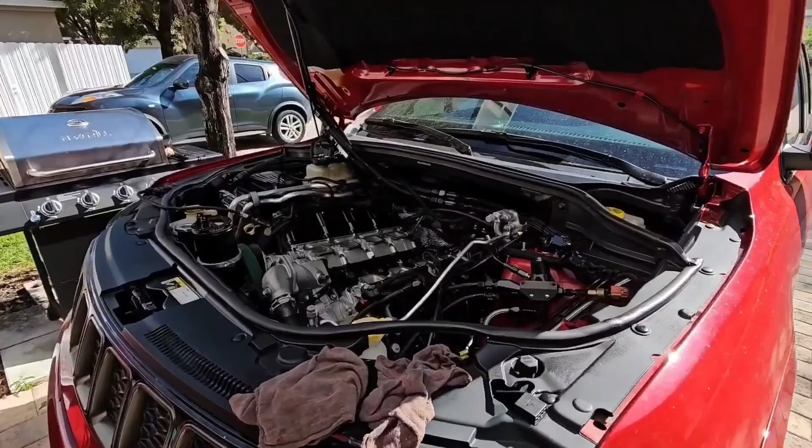So we got the Hawk. This unit had a Gen 5 Whipple on there before. We took that off, sent that to Whipple because we had some issues with that. And the owner upgraded to a Gen 6. Gen 6 is brand new, just released, 3.8. So we're going to go ahead and get that installed here.

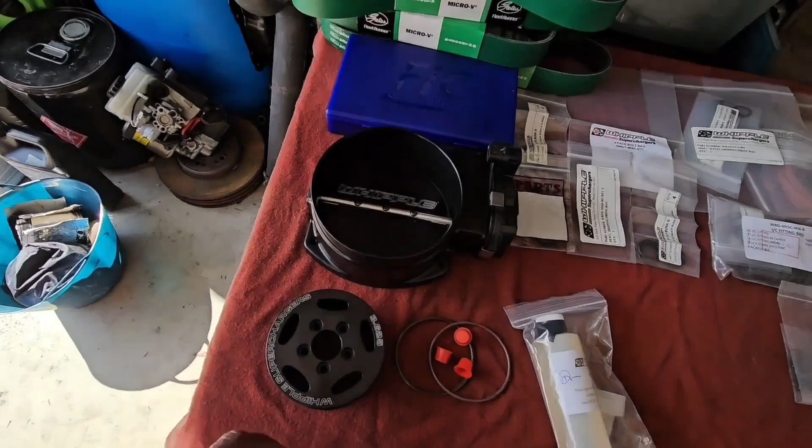We also have a nitrous plate from Nitrous Outlet that we're going to go ahead and install also under the Whipple supercharger. Let's go ahead and take a look at what we got. So we got the Whipple here, massive unit. We got a bunch of parts that came with it, pulley, throttle body. We got some FIC injectors, a bunch of belts. We got all the hardware and stuff that came with the kit.

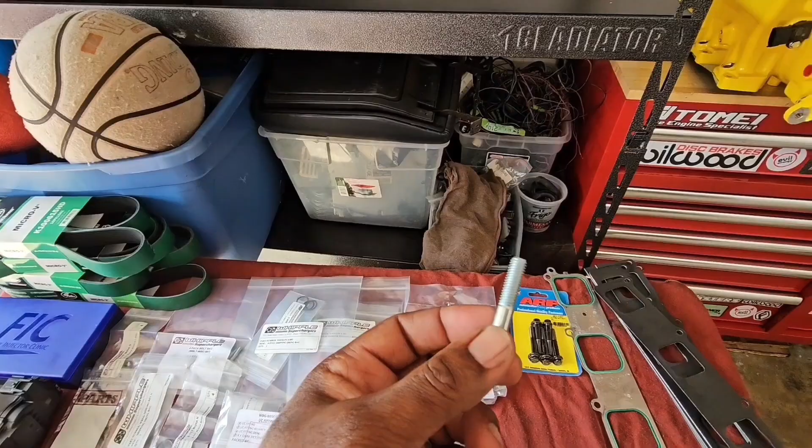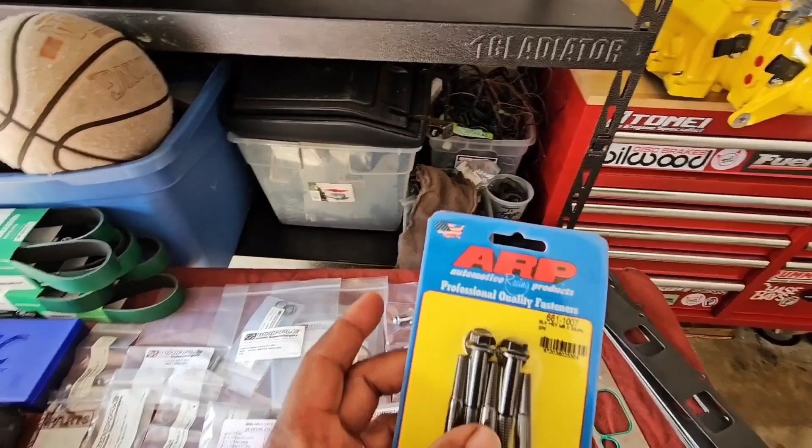One thing we did have to get is some extra bolts. These are the bolts that hold the Whipple to the head. But because we're using the plate, we needed some longer bolts. Those weren't supplied with the kit, so we had to get some ARP ones. So if anybody's interested, that's the part number there. You're gonna need a total of 10 bolts.

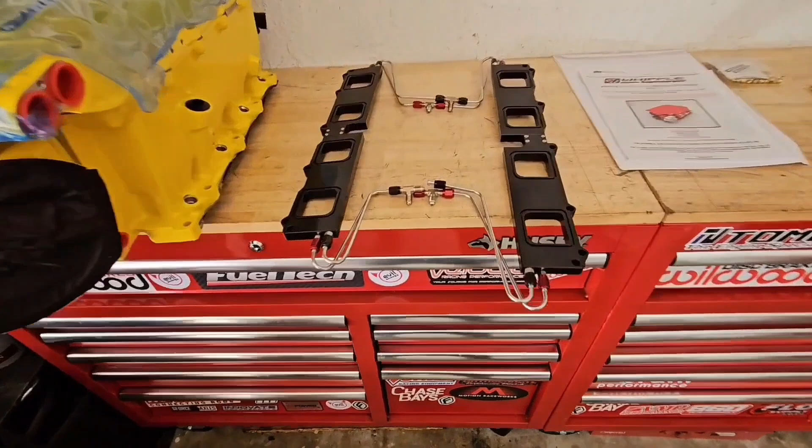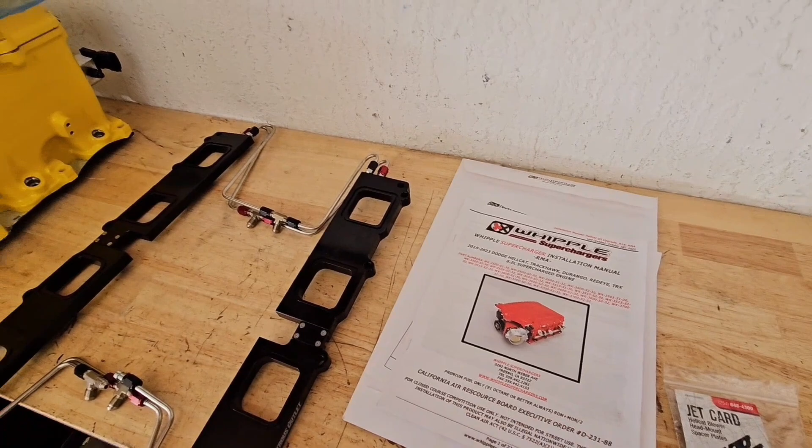These are 50 millimeter. I believe these ones are 40 millimeter factory. Let me see. Should say it right here. 10. These are 30 millimeter. So these are 30, these are 50. So we got that. We got the Nitrous Outlet plate kit. Super nice. That sits under the Whipple. We got the jets here. And we got the Whipple instructions. So we're gonna go ahead and jump right into the installation.

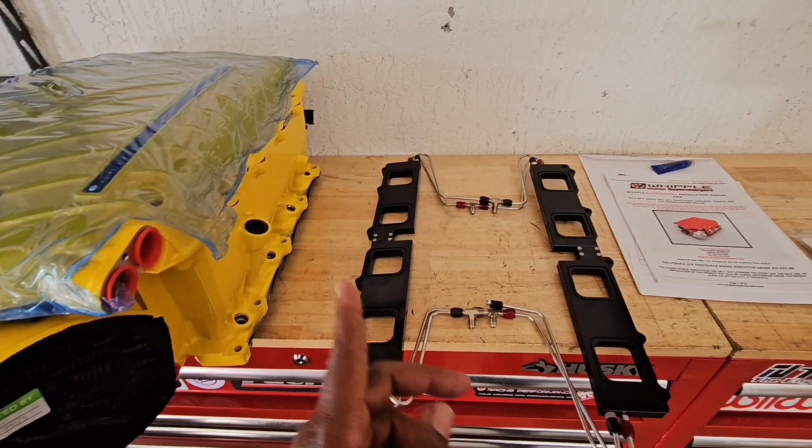First thing I'm gonna do is assemble. Well, I already assembled it. This is a dry fit. So I'm going to pull it apart, install the correct jets. Also going to use some red Loctite on all the fittings because this sits under the Whipple. The last thing you want is for one of these to come loose and you have to take the supercharger off to deal with that. So red Loctite should do the trick. So I'm going to go ahead and pull this apart and install the correct jets with the red Loctite.

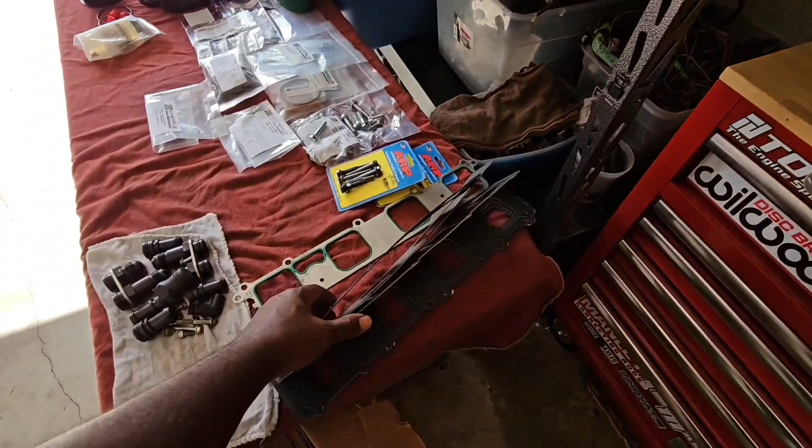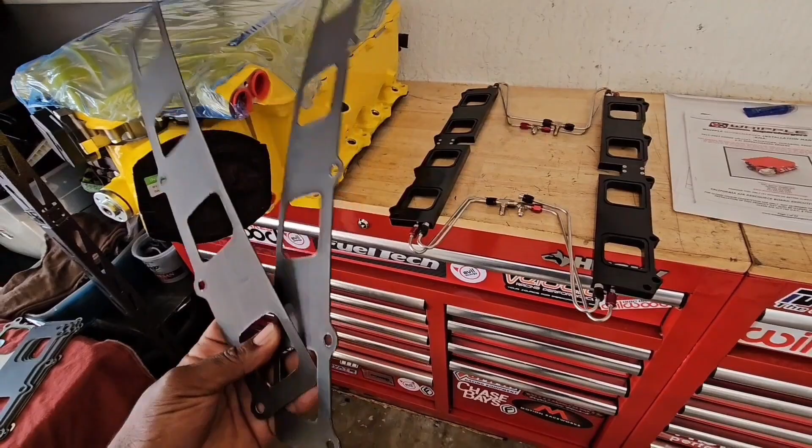And we're going to go ahead and get this on the head first with the gasket. Got a bunch of gaskets here because you Mopar guys are weird with your gaskets, man. I'm gonna be using the Whipple supplied gasket between the head and the plate. So I'm gonna put the plate on first, because of these lines and stuff, and then put the Whipple after. So I'm going to go ahead and assemble this and then jump right back in with you guys.

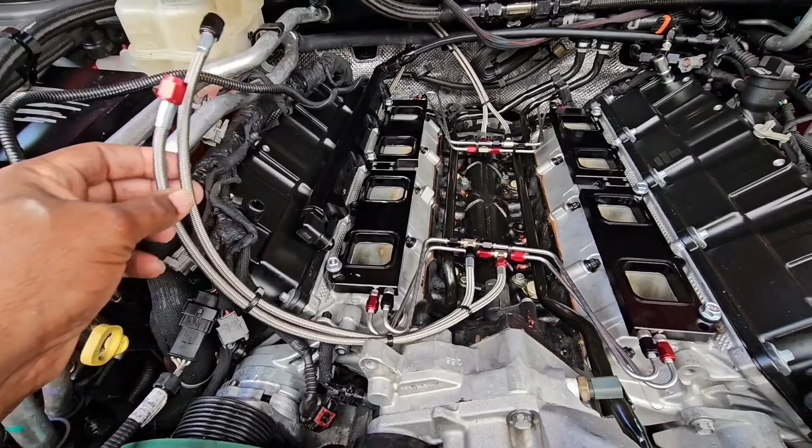So I have the Nitrous Outlet plate assembled and bolted down to the head. I applied a little bit of silicone underneath. So once I lift the bolts up, this is going to stay in place and I could place the supercharger on top without having it shifting around. That helps with the alignment of the gasket and also the alignment of the plate. So I have that bolted down. I have the lines pre-ran, and that's basically how it looks.

So once I'm ready, I'm going to remove the bolts and then I'll put the supercharger on top and bolt that down. But before we do that, I got a couple more things I have to do to the supercharger. So let's go ahead and look at that. So I got the supercharger here and I'm just running through the instructions. Basically, instructions 1 to 4 are swapping over the various map sensors and the coolant temp sensor. Pretty simple.

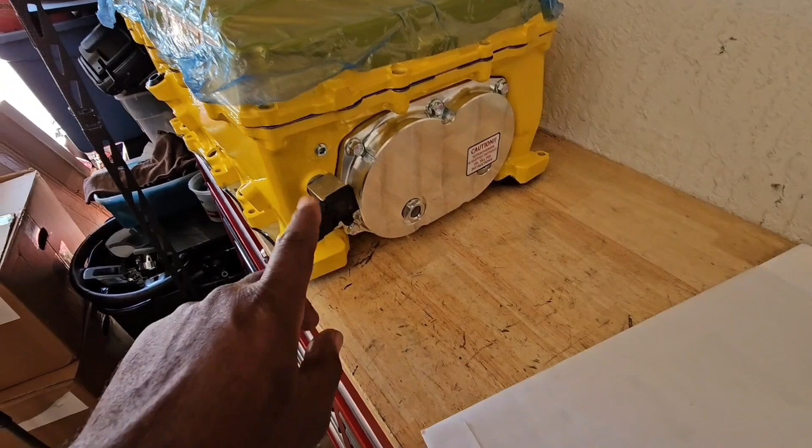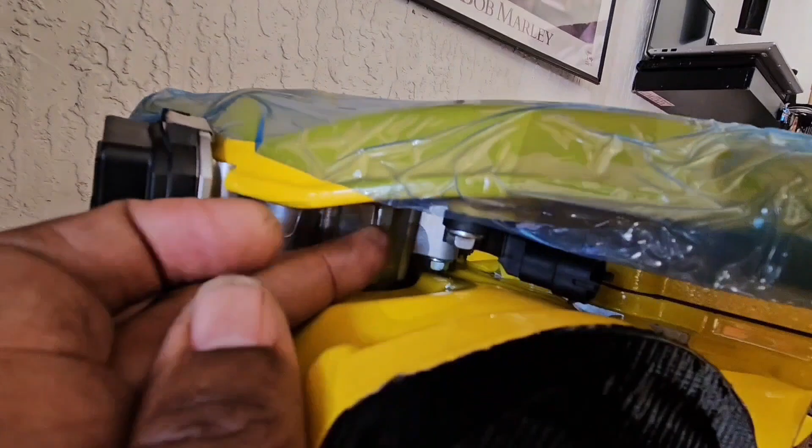So here we got a map sensor here. We have an adapter because we need a boost port. If not, this would have bolted straight to the supercharger. So one map there. We have one right here and one more right there. And then we have the coolant temp sensor right there. So that's basically swapping over the different stuff. In the instructions, it's a little different because this instruction, I believe, is for a Gen 5. So you can see here they show 2 ports in the back, but on the supercharger itself it only has 1. So I mean, it's pretty self-explanatory.

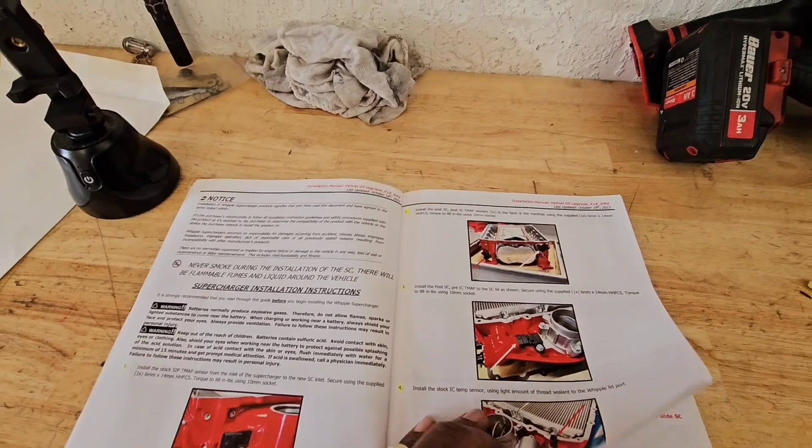They added that one that was here, they added that to the front because now the front has 2 instead of 1. So basically 1 through 4 is just swapping over the map sensors, coolant temp sensor.

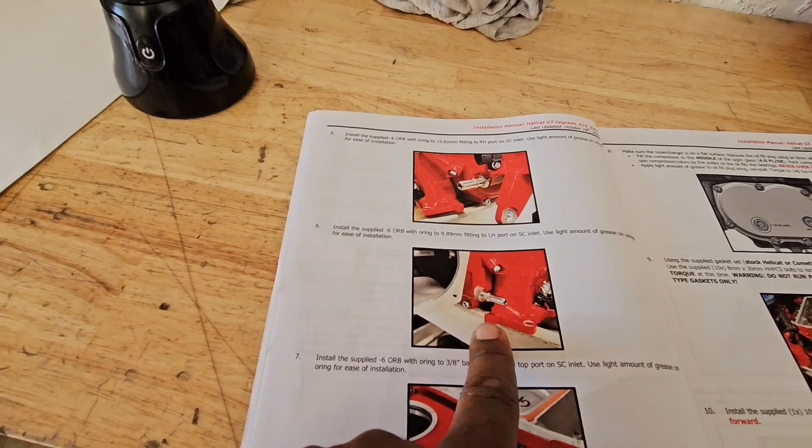These 5 and 6 are some ORB fittings. Not sure if I'm going to use those yet, so those would go here, and same thing on the other side. I'm gonna leave those out for now because I might not use those. I might block them off. They're easily accessible once the Supercharger is on the car, so I'll wait to either add those or I'll have to add some block offs for those.

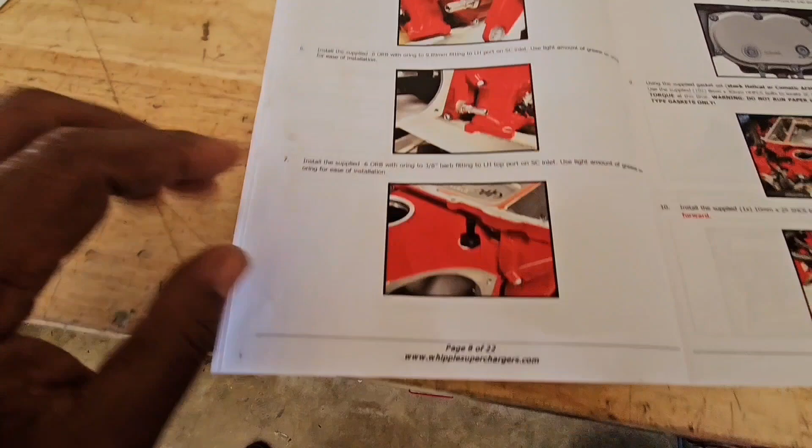This one, again, instruction is for a Gen 5. This fitting is not there on this Supercharger. So as you can see, that's the throttle body there. That's the opening for the inlet. That would be right here. And we don't have that port there. So again, this is a Gen 6. It's pretty new. This is the Gen 5 instruction, so there are very little differences there.

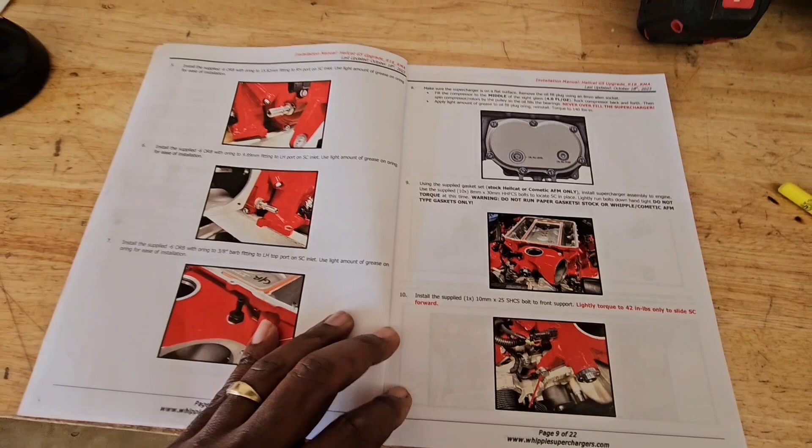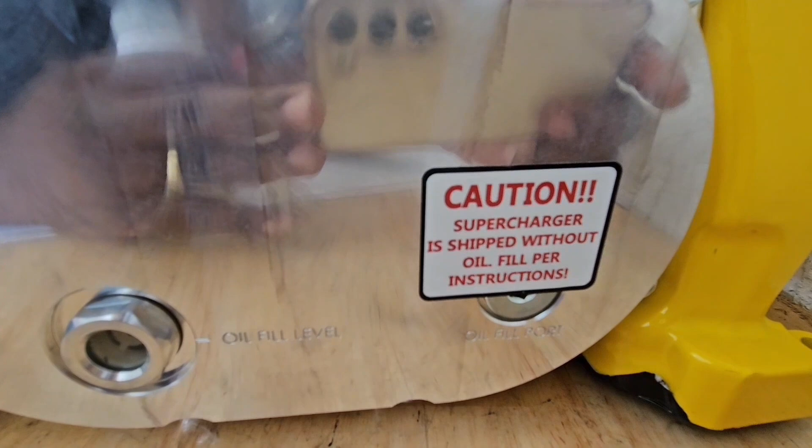So the next step where we're at is going to be adding the oil to the Supercharger. So let's go ahead and jump right into that. So we got the supplied oil from Whipple fit in, and as you can see what it says right there, Supercharger is shipped without oil. Fill per instructions. Alright, so per the instructions, we're gonna fill to the little glass here about halfway, and then spin and rotate the compressor to get the oil into the bearings.

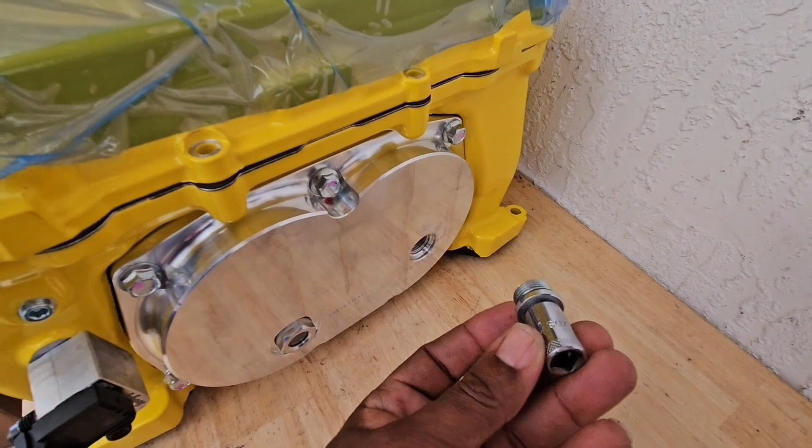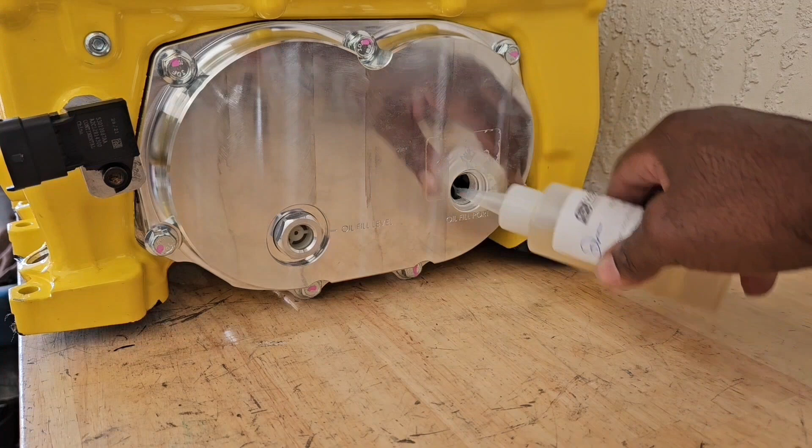So we remove the plug. That's an 8mm Allen. Remove the plug, and we're gonna go ahead and fill with oil. Alright, so we got it here. We got cut off at an angle. We're just gonna go ahead and spray the oil into the Supercharger. You want to make sure you also have this on a flat surface, so that way you could get the best reading for the amount of oil you're putting in there. You're watching in this sight glass here. You want to have the fluid about halfway or in the middle of this glass.

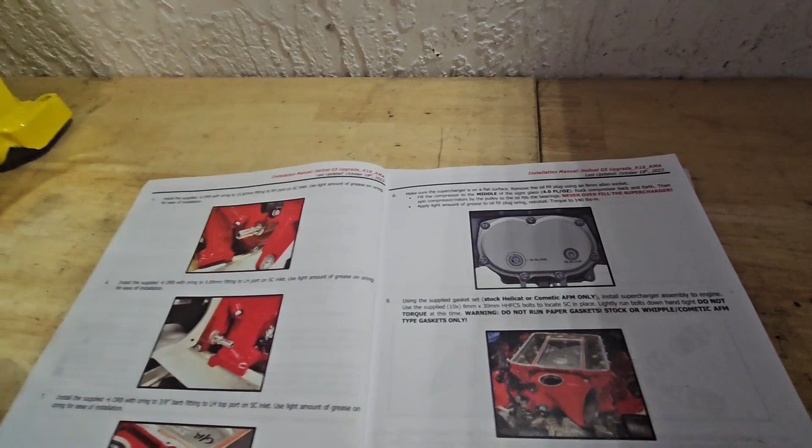Okay, so there's something I want to go over. As you guys saw, I just put 4 ounces into the Supercharger. It's nowhere close to the sight glass to being halfway. The instruction calls for 4 ounces, but the instruction is wrong. So I checked, double checked with Whipple, double checked with some other people, and it seems like it takes about 5.8 ounces. So we had to get another bottle of oil, and we're gonna go ahead and continue putting that in. So again, it's not 4 ounces. You're gonna fill it until you see it halfway in the sight glass.

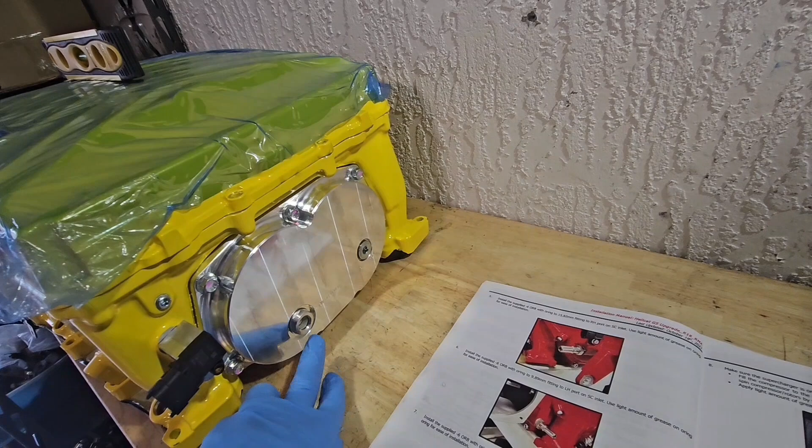And the Supercharger is level, because I had to double check for myself, because I was second guessing myself. But yeah, so don't really follow the instruction. Fill it until you see it halfway in the sight glass. That's a more visible way of knowing how much oil you have to put in there. Again, you don't want to overfill it, but you also, most importantly, do not want to underfill it, because then the bearings are not going to get lubed properly and you're going to have premature failure. So let's go ahead and add the rest of oil and get that level up correctly.

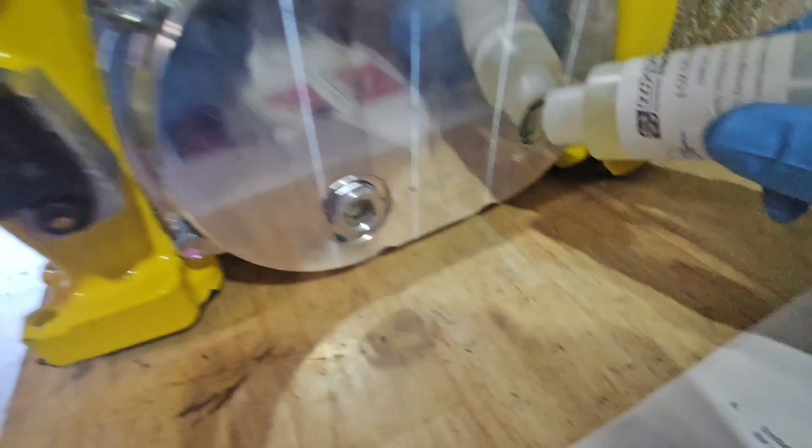So just want to show you guys close. You can see now we have fluid coming up in the sight glass. We didn't have nothing before. So right there, right now, we are about halfway. I'm gonna go ahead and spin the rotor, get everything moving a little bit, and then check the level again. So we are perfect. Right there, you can see the level, good to go. And what did we use? Just right about, I'll say right about half of the other bottle.

So yeah, half would be about right - that's 4 ounces plus half of that would be 2 ounces, so 6. They call for 5.8, so we're pretty on the money there.

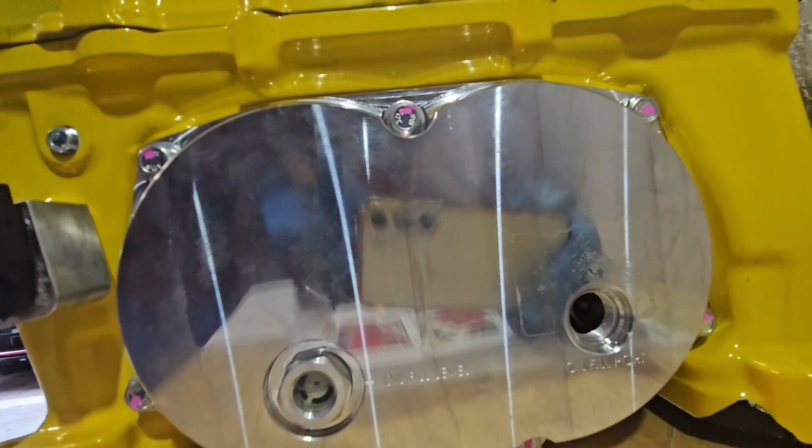I'm gonna go ahead and put back the bung. Just make sure you drop a little bit of lube on the O-ring so it doesn't go in dry and rip the O-ring. Let's drop that back in, then move on to the other steps.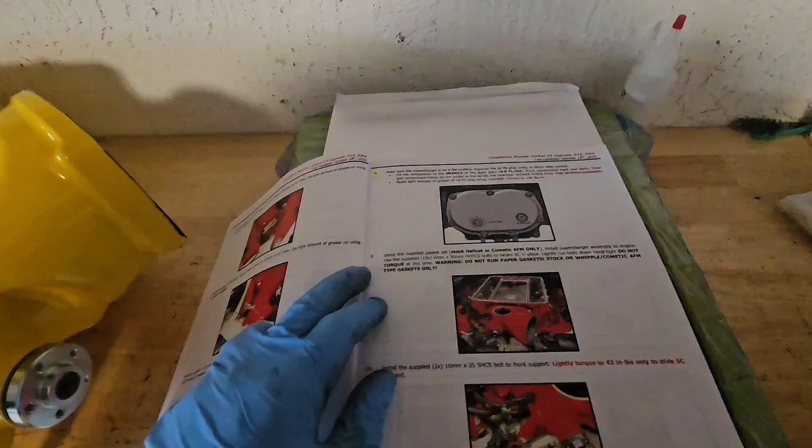Alright, so we got the oil in, step 8. Next step is going to be step 9, which is putting the Whipple on the motor.

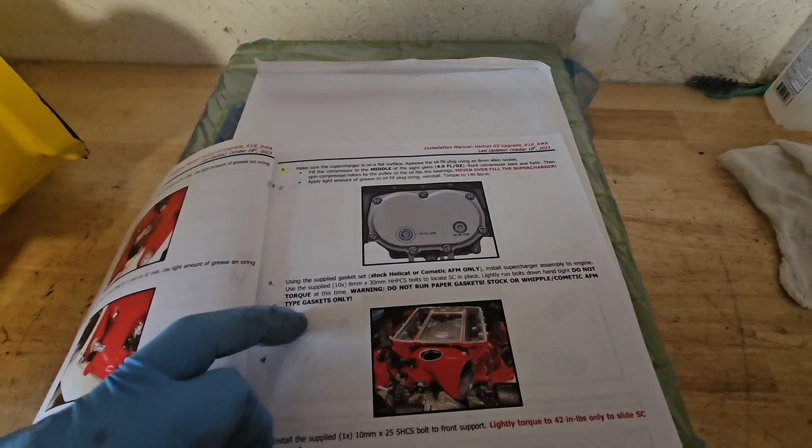The instructions basically say use the stock gasket or the Whipple gasket, don't use the paper gasket. Pretty self-explanatory, not a big deal. We're using the Whipple gasket on both the Supercharger and the nitrous plate. We got an extra set of Whipple gaskets, so we're gonna go ahead and throw this onto the motor.

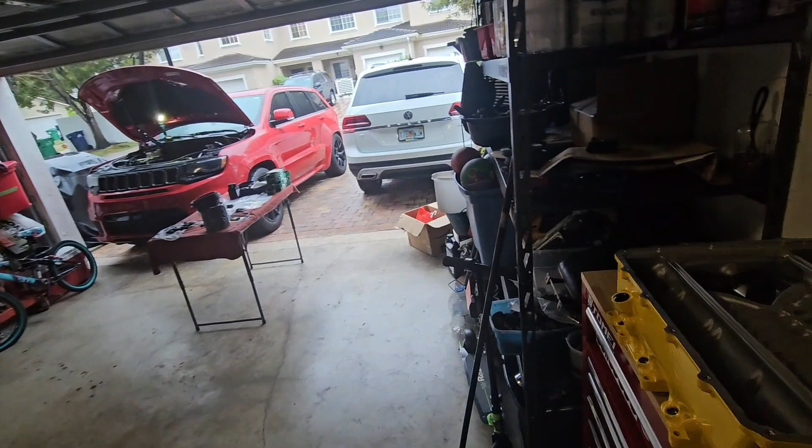I got the bolts here. These are titanium 50mm bolts that we had to get because of the plate - we had to get extended ones. These are the ones from Whipple, I believe they're 30mm. Got a little bit of blue Loctite on the bolts already.

We got the gaskets already there. I put some silicone on the gasket and bolted them down so everything stays in place. So you should be able to just put the Supercharger on without having the gaskets or anything moving. Let's go ahead and get that done, and then I'll jump right back in.

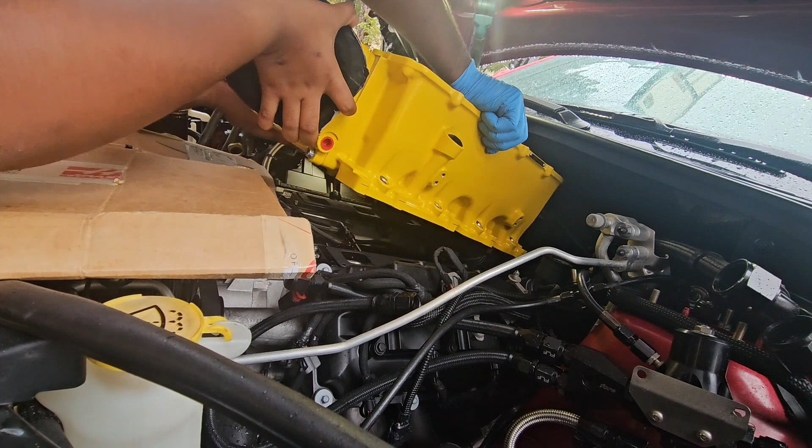Ready? Come back, don't go there. Down. Thank you. Just gotta put it in and have it seated properly.

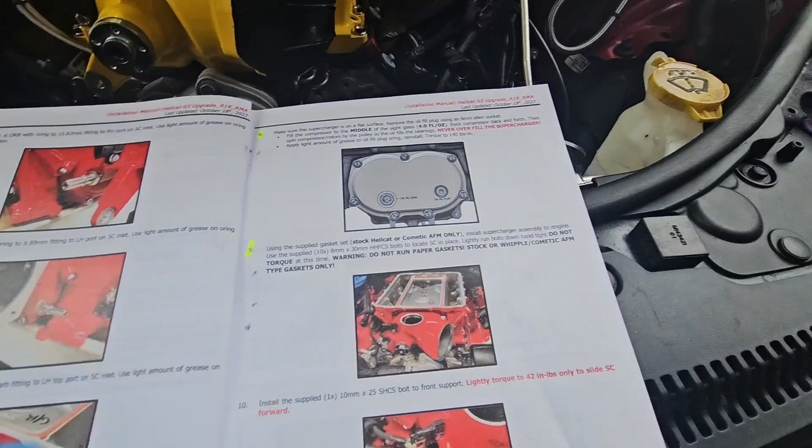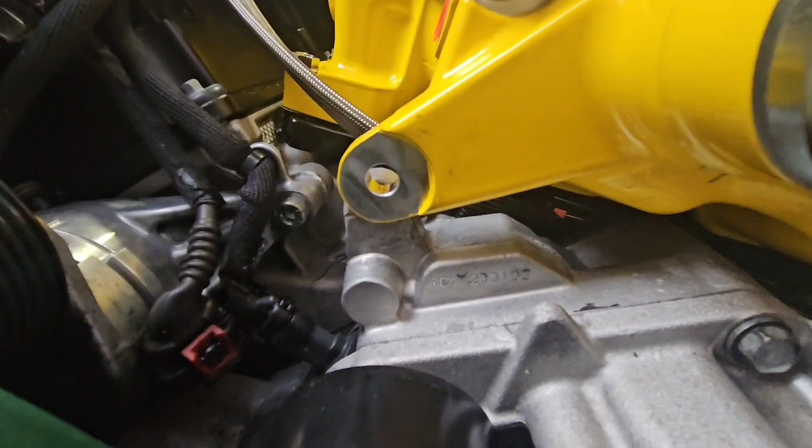Alright, so we got the Whipple on, step 9, boom. Step 10 would have been to add the front bolt to support the front of the Whipple, but because we have the nitrous plate, this one sits a little bit above the hole so it doesn't line up. Once we're done, we're gonna fabricate a plate to bolt it here so it does support.

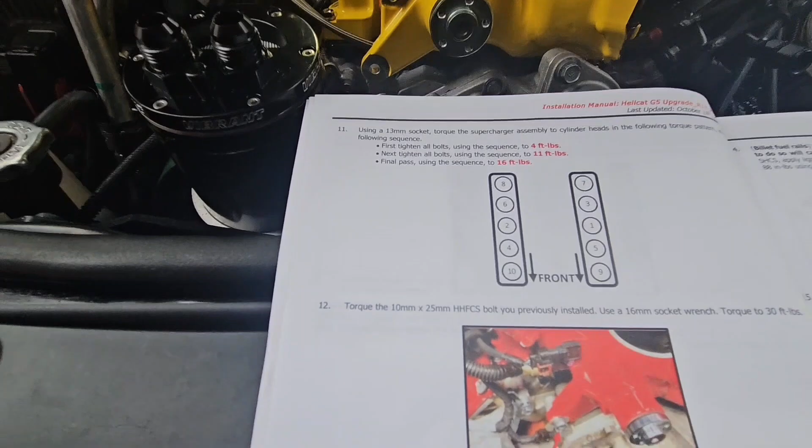So that step I'm gonna skip for now, not gonna mark that one, just like these other ones I skipped earlier. Gonna skip that one, and the next step is gonna be to torque all 10 bolts for the Whipple. I already ran them down by hand - see there, all 10. This is the torquing sequence provided by Whipple.

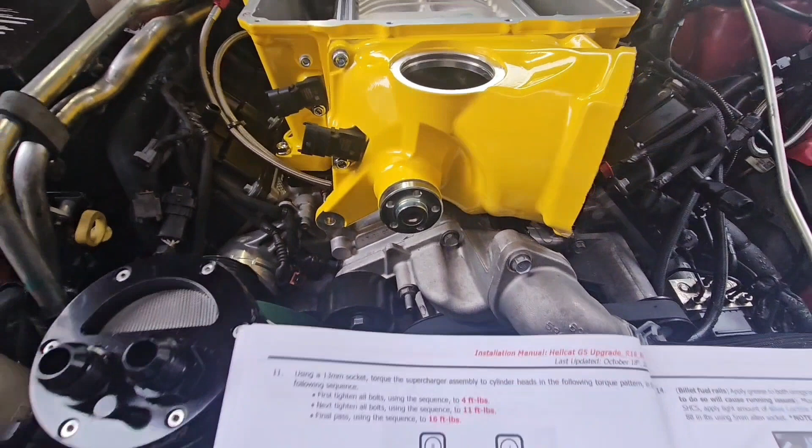What I did was mark it here on the Supercharger lid so that way I don't have to keep going back to the book. Use a Sharpie and just mark it there. Same thing Whipple said - the sequence they want you to do is 4 pounds, 11 pounds, and then finish with 16 pounds. So we're gonna go ahead and get that started.

Alright, so we got the first sequence completed, 4 pounds. After each sequence you just want to test the rotor, make sure it spins freely, nothing is binding. If something is binding, that's an indication that it's not being torqued down evenly and the case is twisted. So we're good to go - we're going to move to the next step, and that's 11 foot-pounds.

So we got it all torqued down to 16 pounds, all 10 bolts, and everything spins freely, no binding, so we're good to go on that.

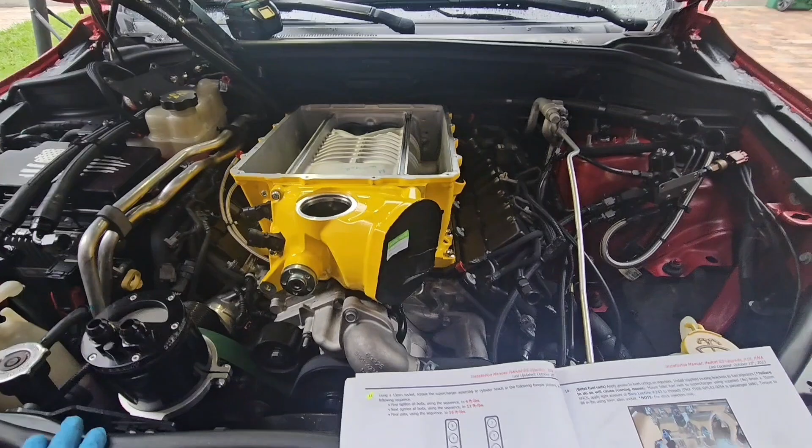When torquing, guys, you just want to make sure you're giving it a smooth motion - no twisting, jerking, just a smooth motion - and follow the torque sequence. I mean, it's there for a reason. So we're good to go on 11.

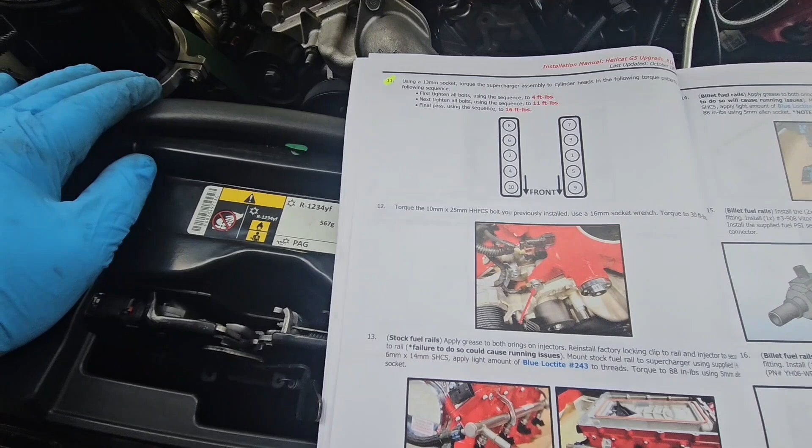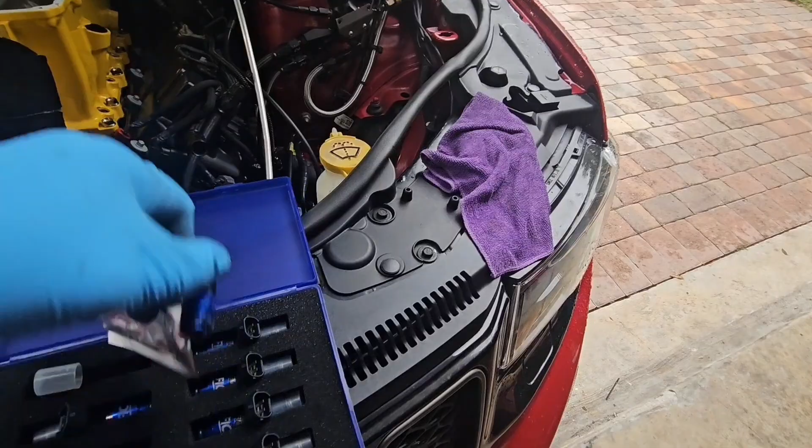So I got the injectors, these are some FIC 2150 it looks like. Before I put the injectors in, guys, you should know this - lube the O-rings. Don't want to go in dry, you already know what happened when we went in dry. Don't want to go in dry. So lube the O-rings, I'm going to lube them and then go ahead and place all injectors in place.

So let me go ahead and do that. I don't need to record that. Let me go ahead and do that, then I'll jump back in.

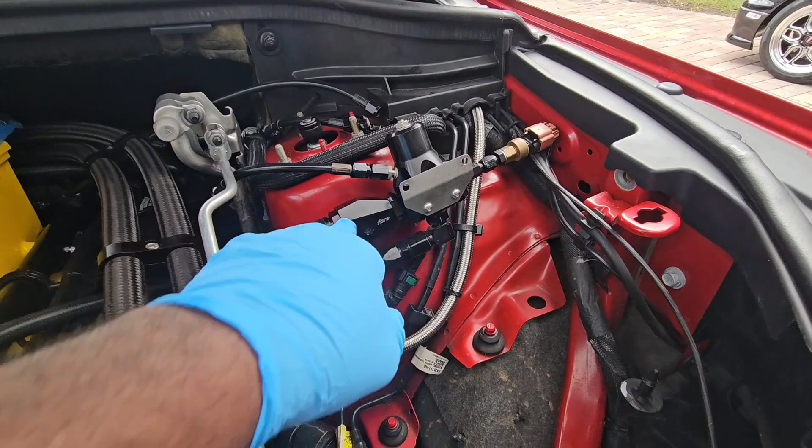Alright, so we got the fuel rails in, FIC injectors in, everything plugged up, and I laid the harness down. Same thing on this side, the rail is in, harness plugged in. On this side we got the regulator, a fuel rail, and a fuel line here. This one goes to that side, but the way they had it running was under the blower.

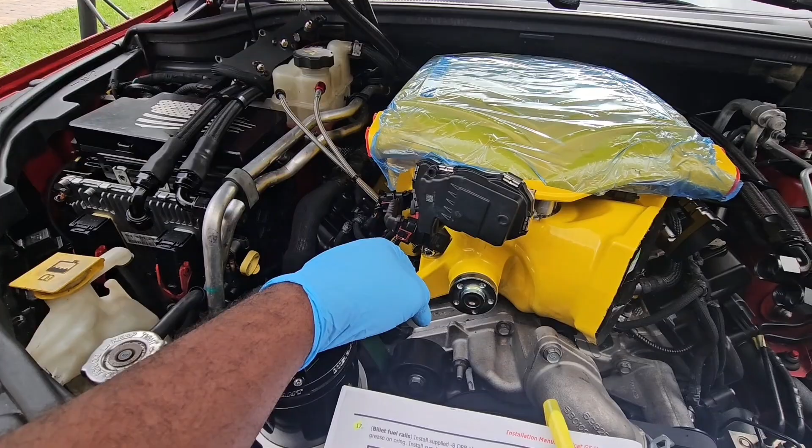I don't like that, so I'm gonna remake that line and run it along with these lines, just behind the blower and coming right here. So I have to do that, but I could do that later on. I don't have to do that now.

So the next couple of steps is basically putting the brackets and stuff on, but this car already had a Whipple on it, the Gen5 3.8, so it has all the brackets and all of that already. So all of that step I'm gonna be skipping.

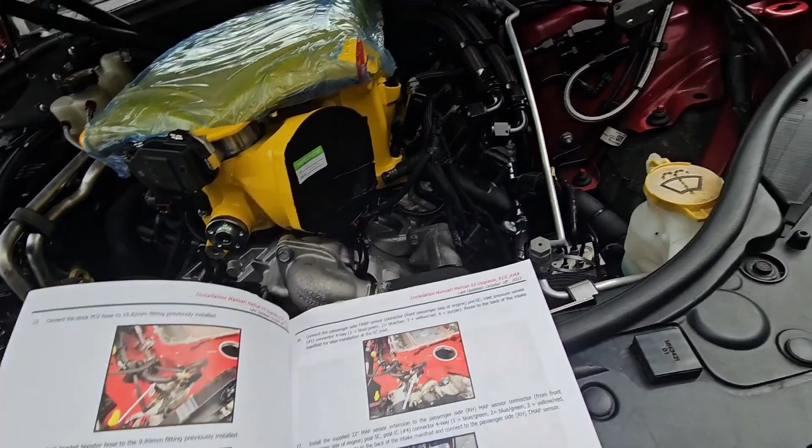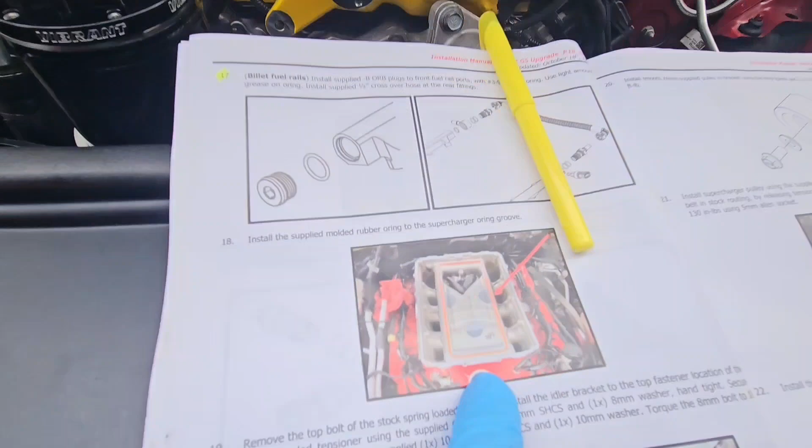So basically the next thing I'm gonna do now is take the lid off. I just rested it on there to cover everything. Take the lid off, put the O-ring that Whipple sends on, you see here the O-ring seal, bolt the lid on, and then just skip through the instructions and go from there.

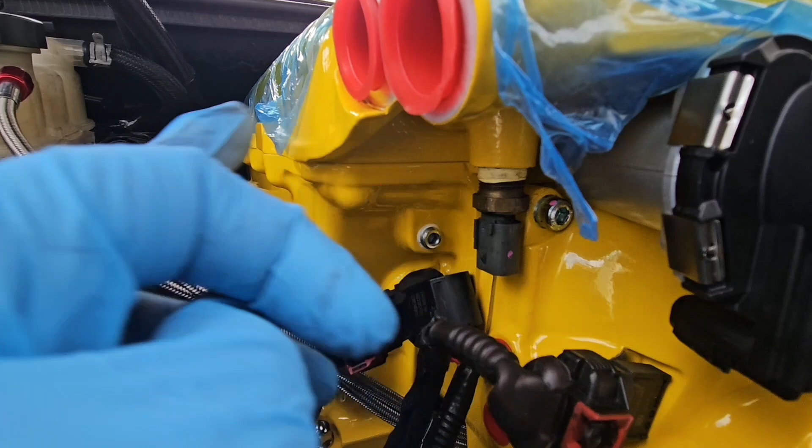I already started plugging up the MAP sensors and all of that. This is for the coolant temp sensor in the blower, or the air temp sensor. That one I didn't plug in because I have to take the lid off. So I'm gonna do that and pretty much go from there - take the lid off, put the O-ring seal, and then bolt the lid on.

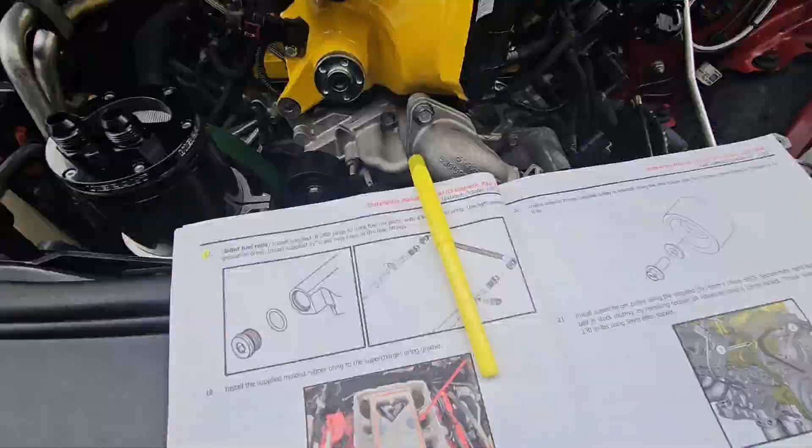So I got the lid O-rings. It also comes with this O-ring that's for the throttle body. It goes right here inside that indentation right there. So don't forget to put that one or you're gonna have boost leaks. And then the main one for right here. So we got that one in and we got the O-ring in.

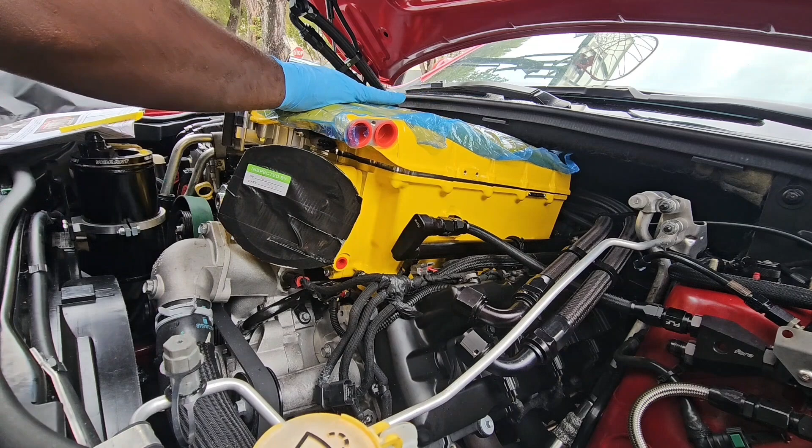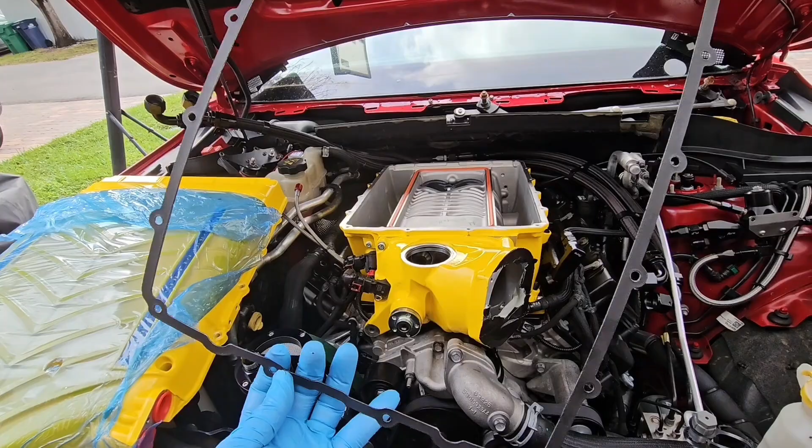Don't be like me guys and forget to put the gasket on. I got the O-ring for the cooler, and I also got the O-ring for the throttle body, but I initially forgot to put the gasket on, so I had to take the lid back off. So remember to put the gasket, don't be like me. So I'm gonna throw this on and then throw the lid back on.

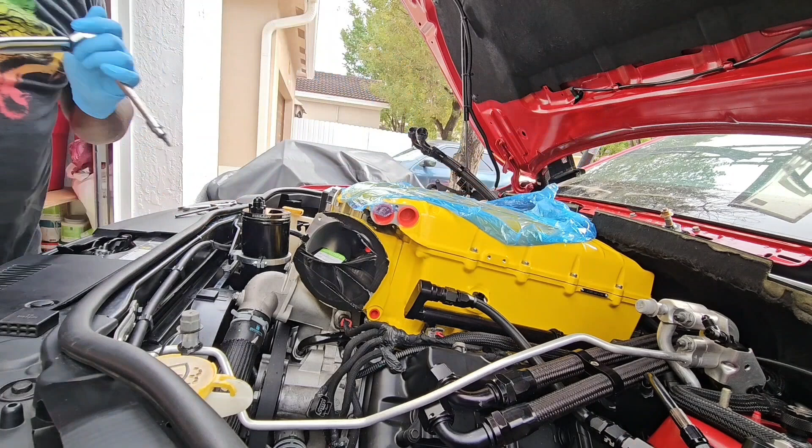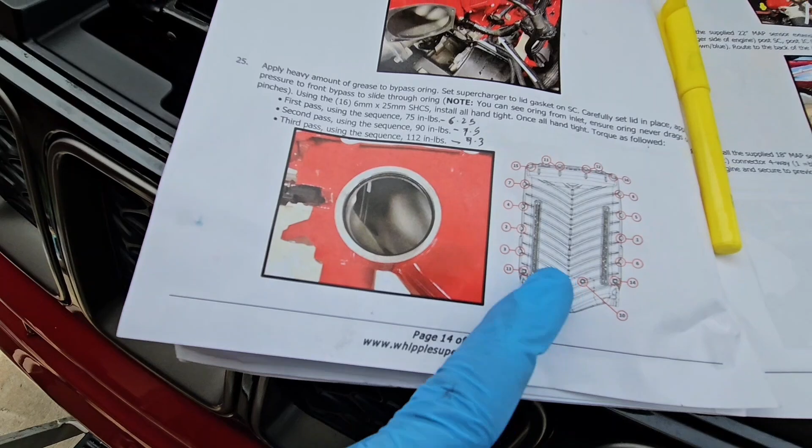Okay, so I got the lid on with the O-ring here for the throttle body, with the gasket, and with the O-ring, so the lid is on. Torque specs are in the book, let's pull that up - torque specs here or in the book. Right here it also has a tightening sequence, which is also good to follow. Not as important as the first one with the base, but still important for proper sealing.

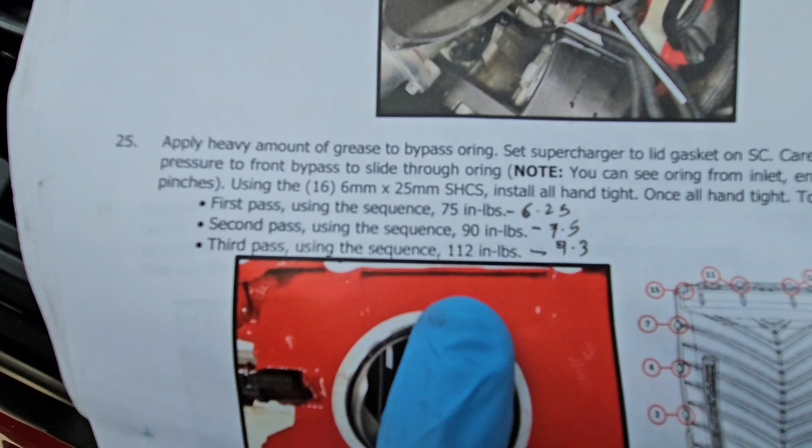The torque specs are in inch-pound. I converted them to foot-pound because I don't have an inch-pound torque wrench. So it's 6 1/4, 7 1/2, and about let's say 9 1/4 there for that, in foot-pounds. If you have an inch-pound wrench, use the inch-pound spec.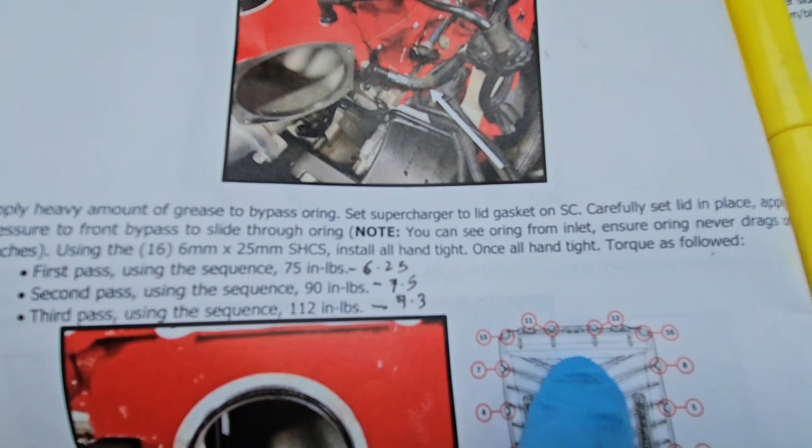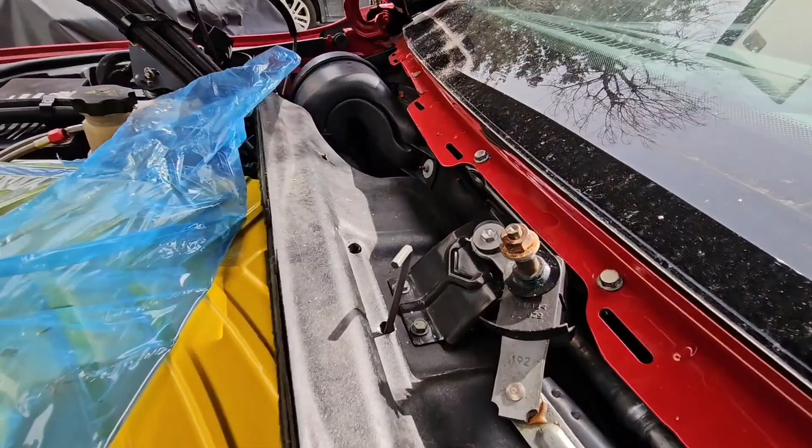For the 2 bolts in the rear, which are these ones here, because we have the nitrous plate and also because of how big the Whipple is, it's really hard to get back there to tighten the bolts. So what I did, and I spoke to the owner of the car before I did this, I drilled 2 holes right there. This is under the cowl for the windshield wiper, so you won't see it because it has a cover here. So I drilled 2 holes, about 10-11 millimeter size holes, so I could fit the bolt and also an Allen wrench to tighten in the back.

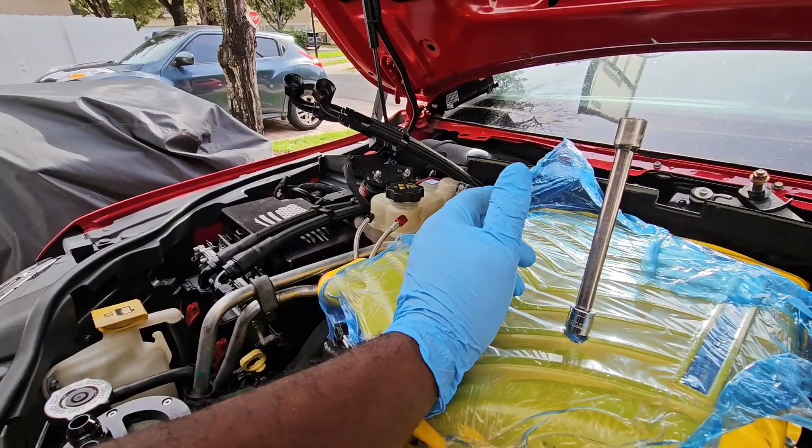The back ones, and also these ones - unless you have a special long tool that fits in there, you won't be able to torque these. I hand tighten them based on what I tightened here, I had a feel for it. Don't over tighten them because you will break the bolts.

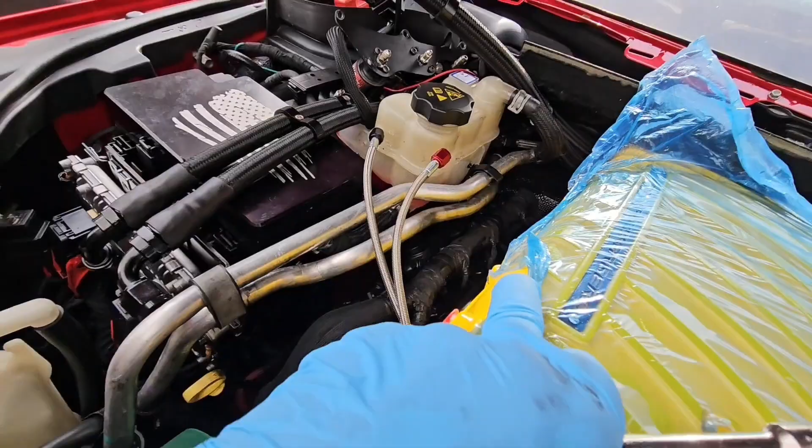The bolts aren't super large, so I just hand tighten these, going pretty much by feel for torque. That's one, let's see - 1, 2, 3, 4, and the 2 in the back. All the others, as you saw, I torqued to spec, and these I just tighten with the Allen wrench, not torque.

So we got the lid on.

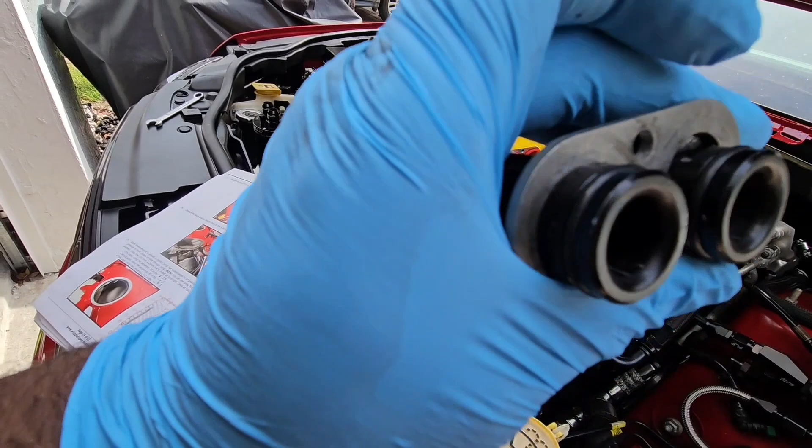I'm gonna go ahead and put the fittings for the cooler on. We're not using the standard Whipple cooler, which has push-on hose type fittings. On this car we have a chiller, and we converted it to AN, so I have fittings similar to these. Gonna go ahead and swap the O-rings, even though they were new since I'd swapped them before. Gonna go ahead and put this here and put those on. So let's get it.

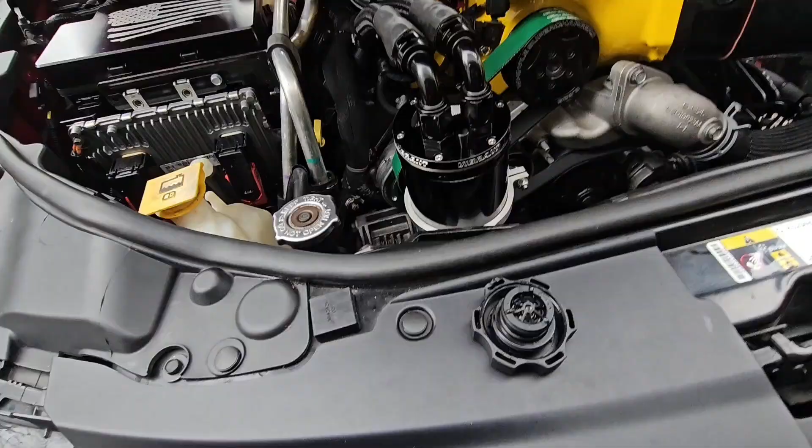All right, so I got the fittings in and also connected the lines for the chiller. I did a lot of stuff off camera.

So I got the nitrous solenoids mounted. Each side has its own solenoid - we got a fuel solenoid here and a nitrous solenoid here, and we're gonna be running on those. So that's how we're looking. The lines previously run to the plate, we connected to the solenoid - that's the purge and that's the nitrous fuel. So we have all that mounted.

I also did some wiring, added some connectors here, so in case you need to remove the solenoid it's a lot easier than having to cut anything. Also added one back here.

This wire I think I'm gonna have to extend. I don't like how it sits here on the supercharger - I want it to tuck under here. So once I get everything running and start it, I'll do this last. I'll just cut this and extend it a little bit more, kind of like this side - see how this side is tucked in here? That's how I want it to look.

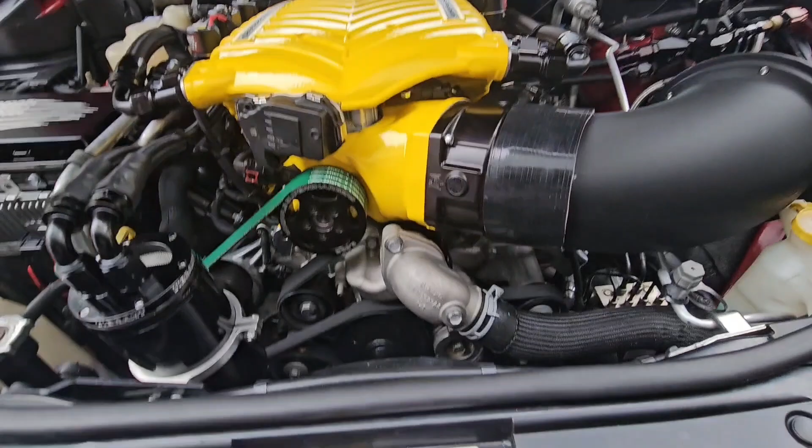Also went ahead and threw on the belt. We're running a K100 615 HD - that's the one we need for the plate, because it needs to be longer. Also connected the catch can lines.

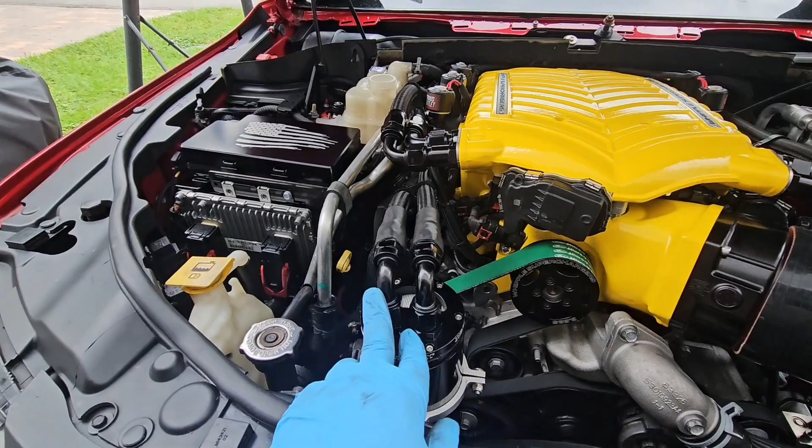I'm gonna go ahead and put some fluids in, and then we should be able to crank this baby up. We also have a custom 3D printed cold air intake here that he got made with this vent. Pretty cool deal - we're waiting on a filter to come for this because it's pretty big. He also has an adapter to where he can run it without a filter, which is pretty cool.

So again, I'm gonna go ahead and put some fluids in there, check the oil. I did an oil change on this already, so just verifying the oil level, and then we can go ahead and get the first startup, and you guys will see that. Let me go ahead and put some coolant in there, and I'll be right back.

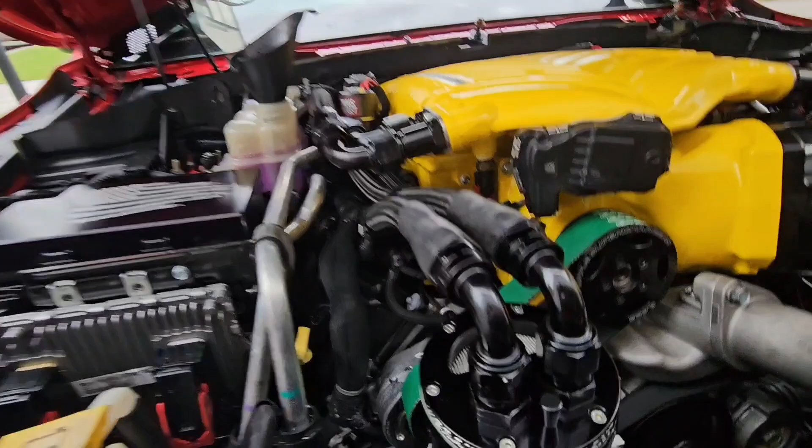All right, so I got ignition on, fuel pump primed, and I'm just checking the fittings for leaks before I try to start. If there's a leak I'll see it right away, and then I can address it before we try to start. So far, looking good. Let's go ahead and try to fire this baby up.

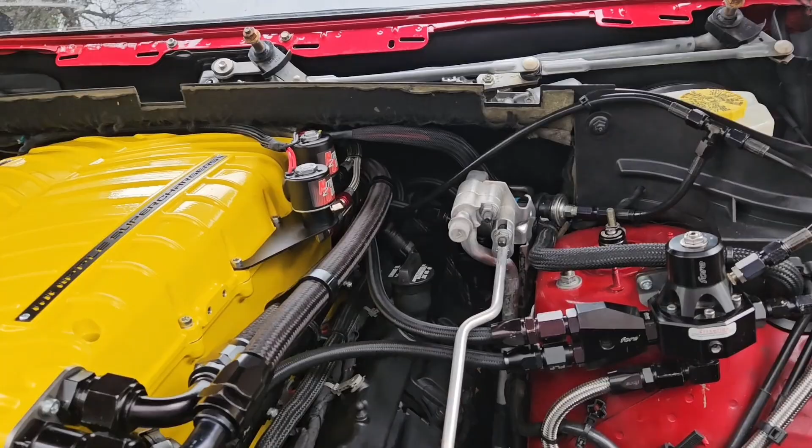Sounds good. The little smoke you see is just stuff burning off - I was touching everything, coolant was leaking everywhere. So that's just stuff burning off. I don't see any leaks right now, but obviously I'm gonna keep an eye on everything.

So yeah, she fired up, first try.

So guys, I'm gonna go ahead and close this video out here. It's been a pretty long video, but as you see, the Whipple is on. We're running good, got the filter on, got everything going good. So the next video of this you should see is doing some testing, doing some hits.